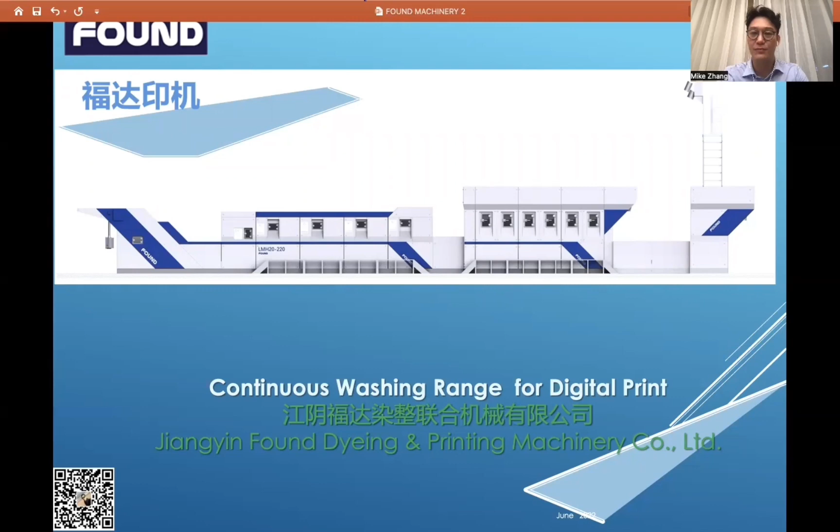Found Machinery Company was founded in 1983. We are one of the directors of the Home Textile Association, China Dyeing and Printing Association, and the China Knitting Industry Association.

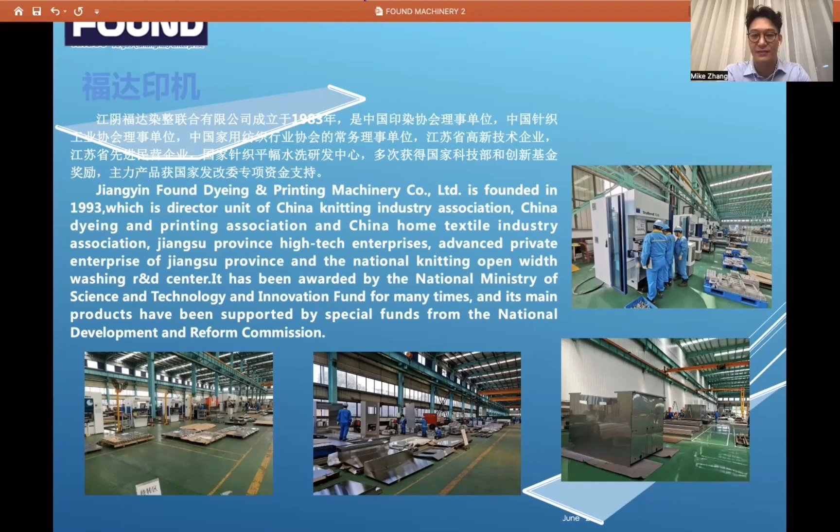We have one R&D center focused on washer after print. Since we have 40 years experience in this industry, we are offering different kinds of machines to the market all over the world, including pre-treatment machines and after-dyeing or after-printing washing.

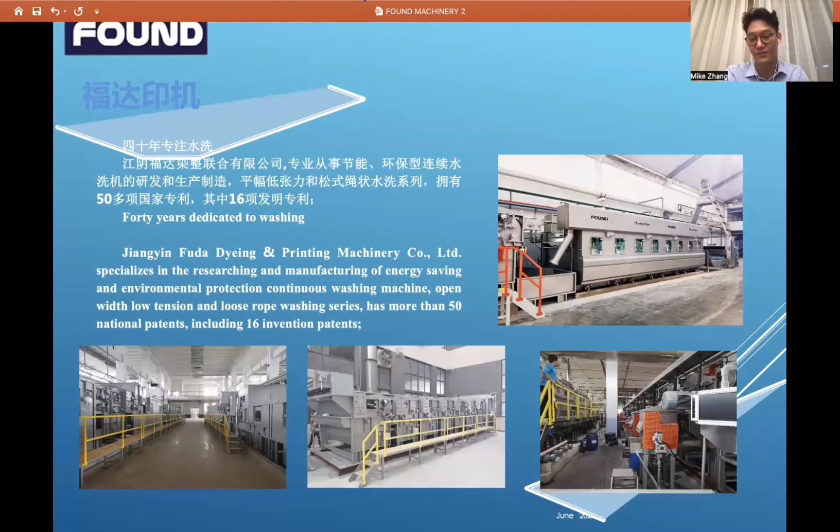We are specialized in the low tension washing machine. And now we have more than 50 national patents, and 16 of them are invention patents.

Since the digital printing industry is booming these years, Found started our machine design 10 years ago, including the pre-coating machine, steamer, and the washing after digital printing. It was small production years ago in digital print, but it is getting bigger and bigger.

We started to do the pre-treatment and the washing by ourselves, while it was done by other traditional printing companies before.

Production in digital print is getting much bigger, and we need better quality control and high and quick delivery time. All these reasons make digital print companies becoming total solution printing companies, like mini traditional factories.

But digital print is quite different from traditional. We have to buy the right machine for smaller space, smaller power consumption, including water consumption. And we need to fulfill different kinds of fabrics, which may be tight or soft, woven or knit, light or high GSM.

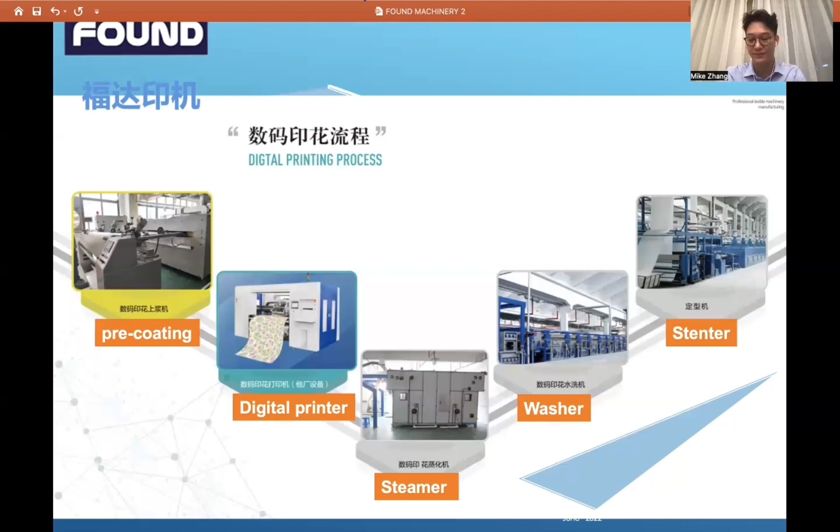Yes, this is the pre-coating machine. Actually, this design is mainly derived from the stenter. We can also call it the mini stenter machine.

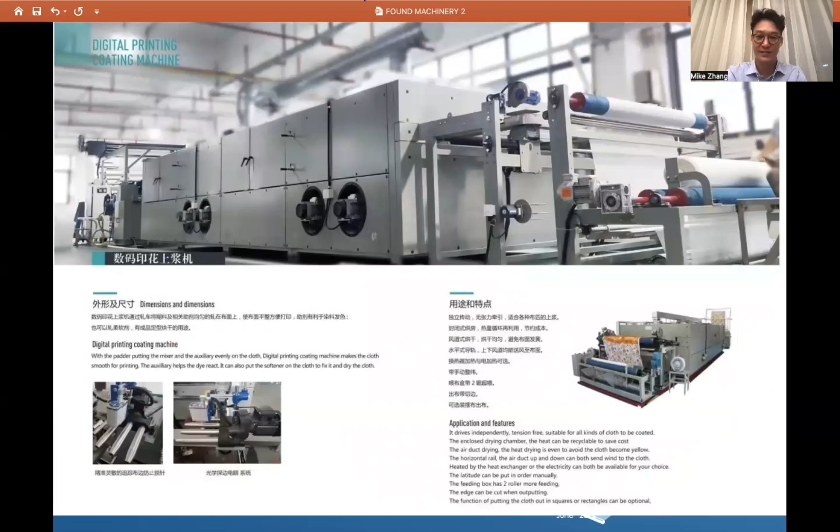In the pre-coating machine, we include everything like the stenter, including the opener, the centering device, and the heating system. For the heating system, we have two options: one is the electric heating system, another is the steam system. Also, we can choose gas if you want.

In the drawing, we can see the size. It will be around 13 meters for the standard design. The machine width will be around 2.9 meters, and including the control panel, it will be around 4 meters.

We can see in the drawings, there is one padder and 3 chambers of dryer. Then we can use the plater or the folder at the end of the machine.

For the pre-coating machine, we will control the temperature around 120 to 130. The consumption of steam will be around 200 per hour. And the power will be around 15 kilowatts.

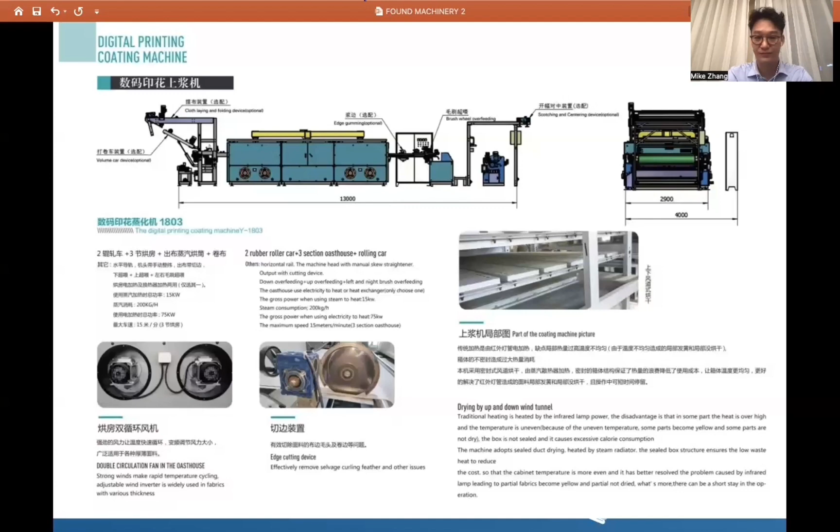The speed of the machine will be around 13 to 15 meters, like for silk or light fabrics. And for woven viscose fabric, the speed will be around 10 meters. But of course, if the fabric is heavier, it will be a bit slower compared to the normal speed.

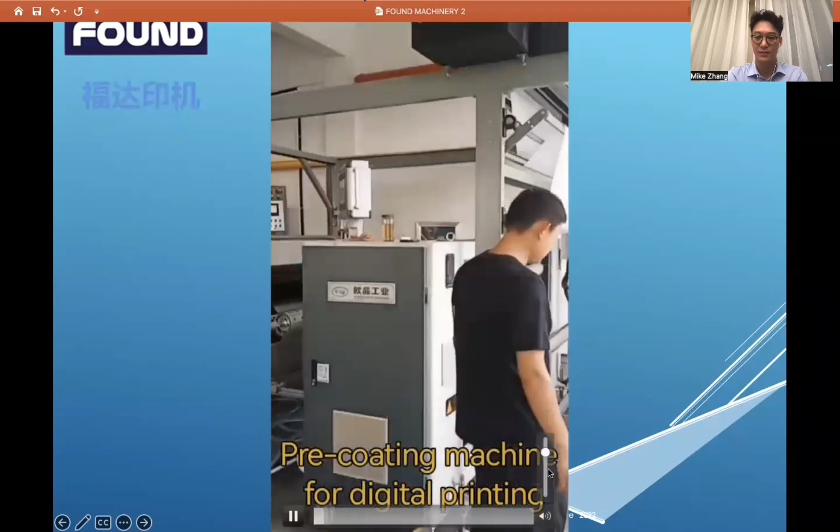Now we can see the video, which is running in the customer workshop.

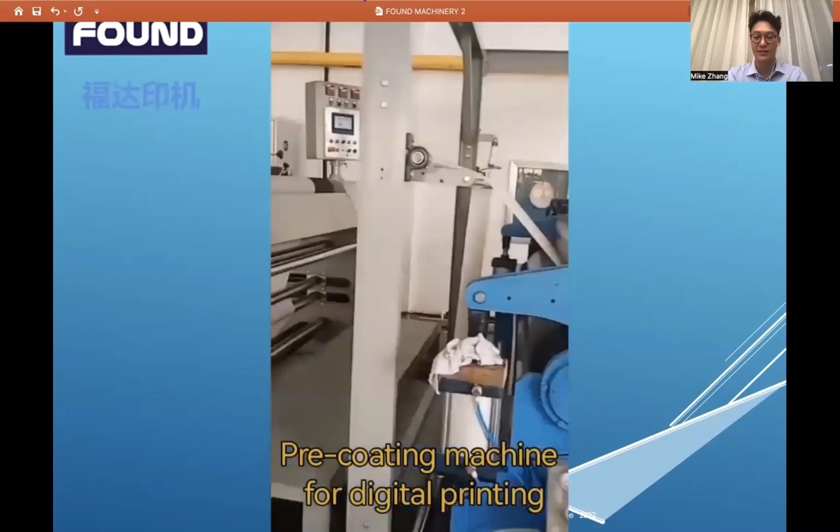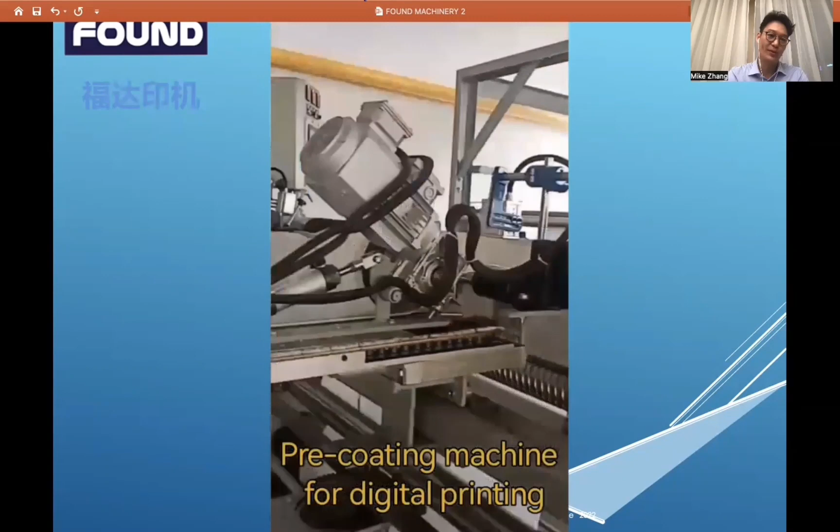You see the first device, it can adjust the fabrics. The second is the padder. Then here is the feeding system. Before feeding, we open the fabrics. No matter if it is cotton or knit, we can handle it.

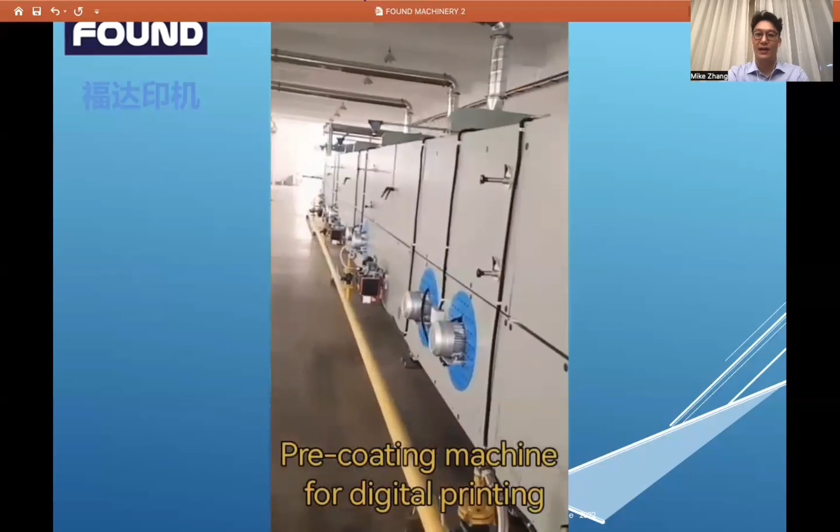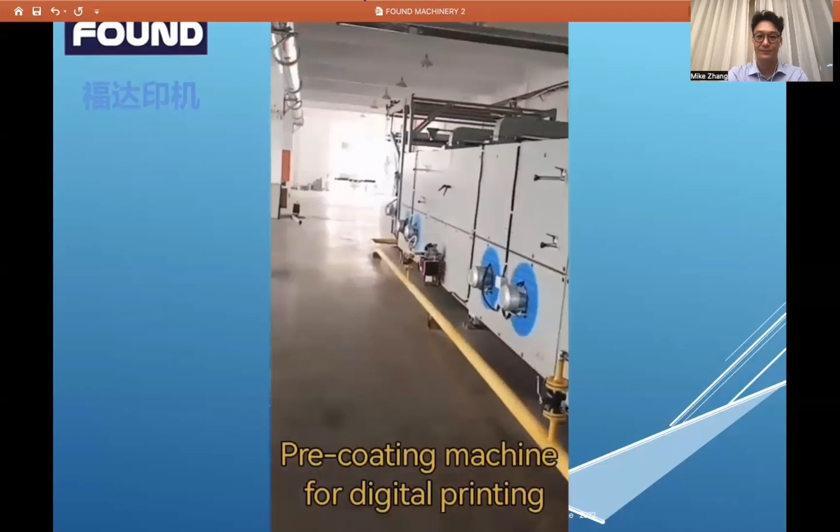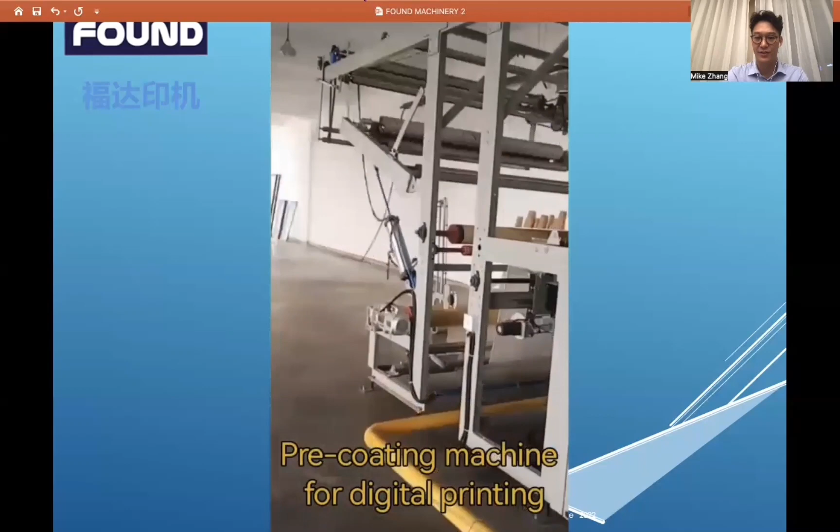And this one is the upgraded design, so the speed can be a bit higher. Now it is running around 20 meters. At the end of the machine, we can use the folder or the plaiter, depending.

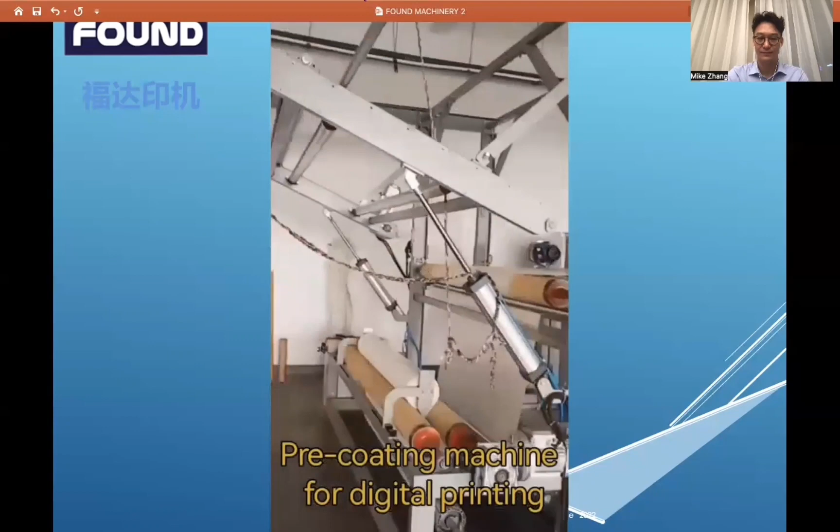We can see there is one device which can help to control the edge of the fabrics.

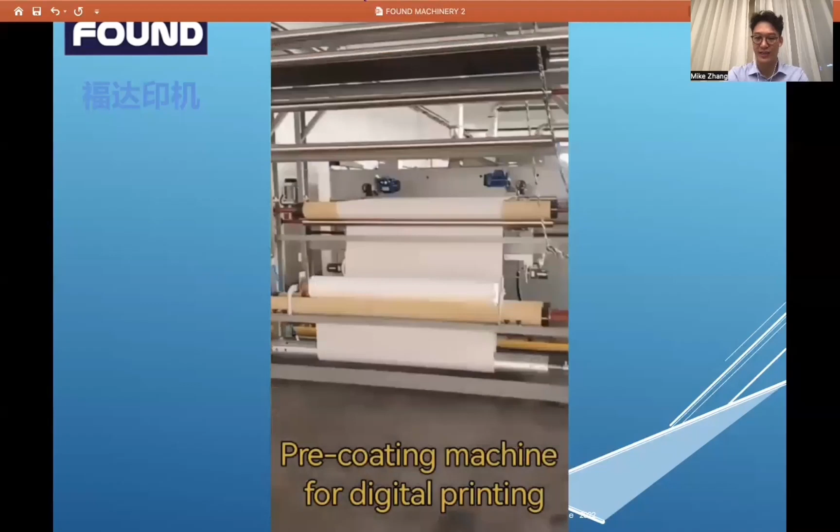Next we will go to the steamer of the digital print. As we know, the digital print steamer is quite small. At the very beginning, years ago, it was only 20 meters capacity. Now it is getting bigger and bigger. Now 80 meters capacity or 100 meters capacity is very famous in the market.

We will keep the temperature around 102 or 103 centigrade, and we will get 12 to 15 minutes steaming time for good quality. The consumption of the machine will be around 100 kg per hour. So we can get around 7 meters per minute speed, which means we can get around 400 meters per hour.

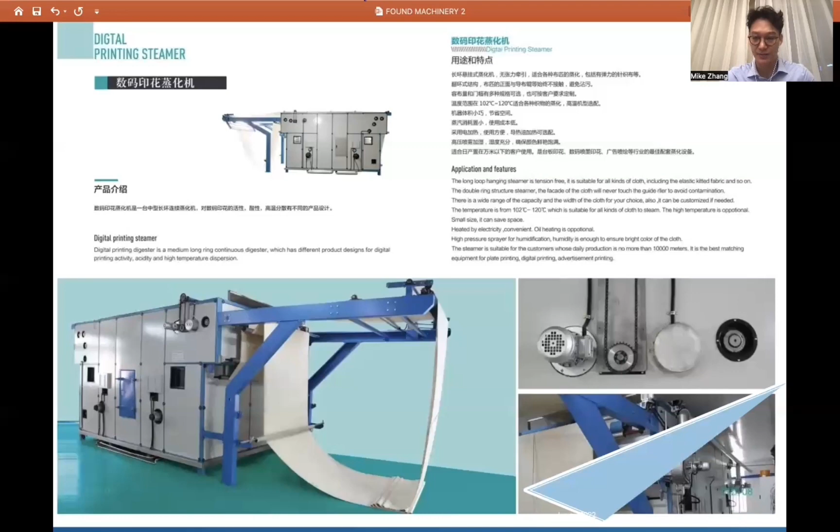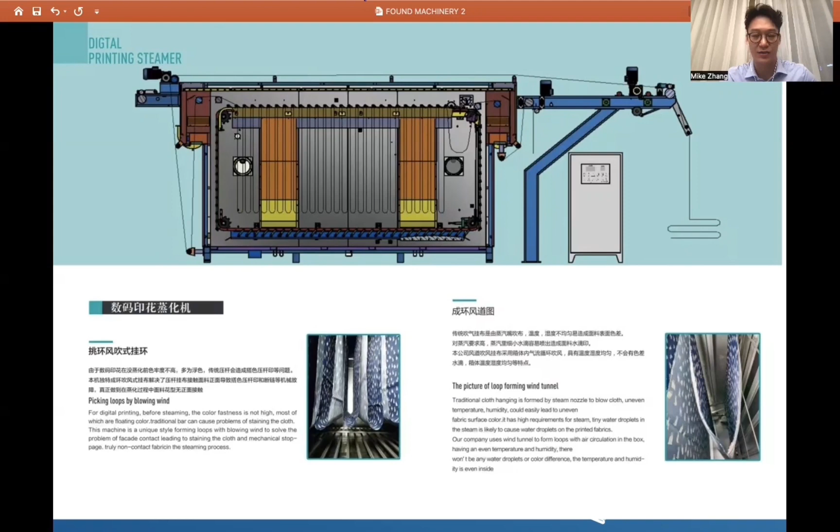For the next page, we can see the situation inside the steamer. The length of the ring, which is hung inside, is around 1.6 meters - I mean the length of the fabrics from top to the bottom. And we use air to make the ring of the fabrics to prevent the stain on the printed surface.

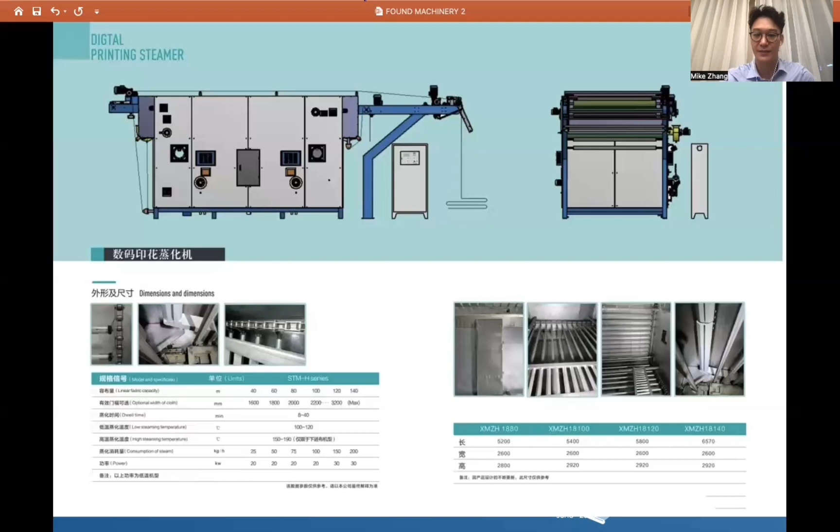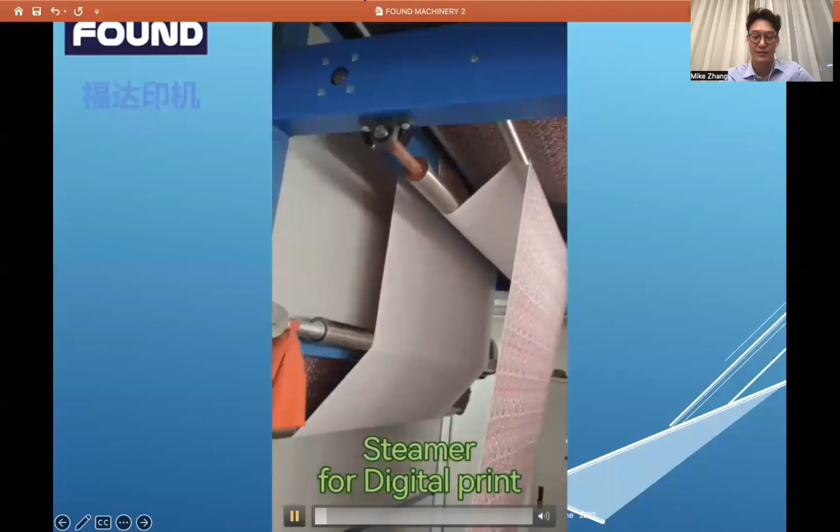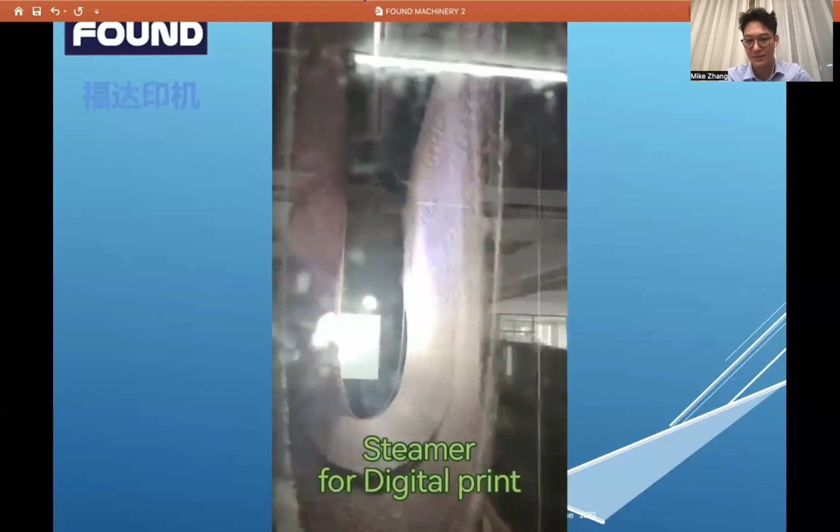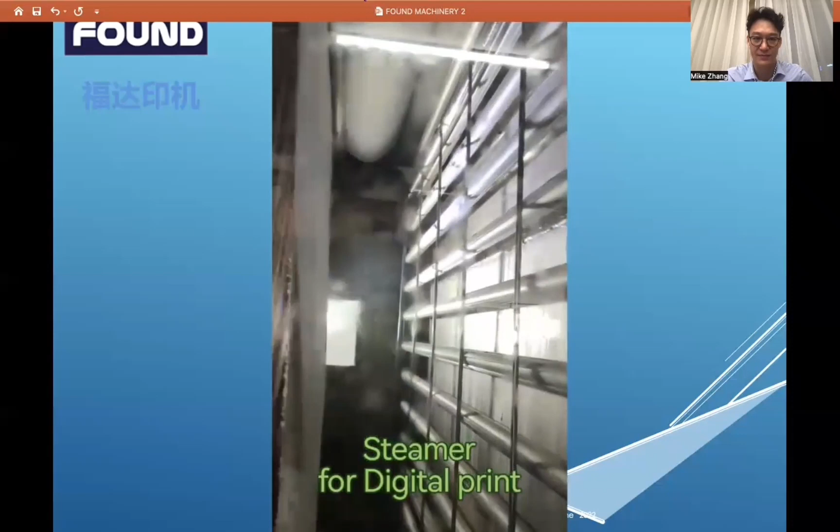Next, we will see the working video of the steamer. This machine is designed for the customer who doesn't have enough space, so the feeding device and the plaiter device are on the same side. The operator only stands at the feeding position so that he can control the machine very easily. Here we can see we are using air to make the ring of the fabrics, so there's no touching on the surface.

Next is the most important thing of this speech, the afterprint washer. Found is very famous for the washer compared to other machines - we have a history of 40 years, and the first machine we made was the washer. Today, we will introduce two options for washing after digital print.

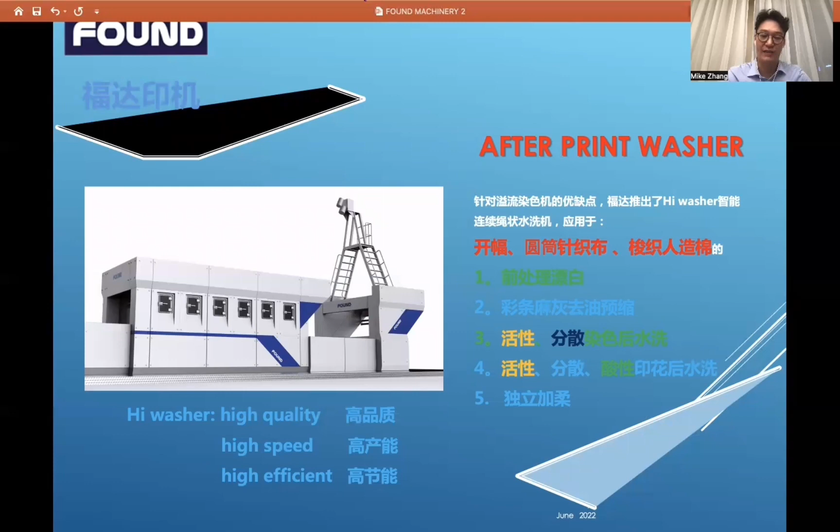The first machine is the open width washer. It is widely used in China and other countries because most digital printing is done on silk. This open width digital print washer is very suitable for customers who are mainly doing silk and woven fabrics.

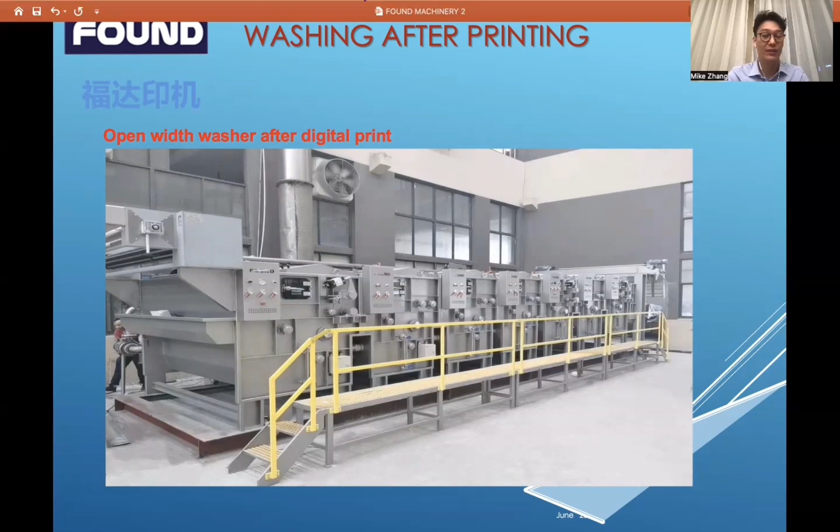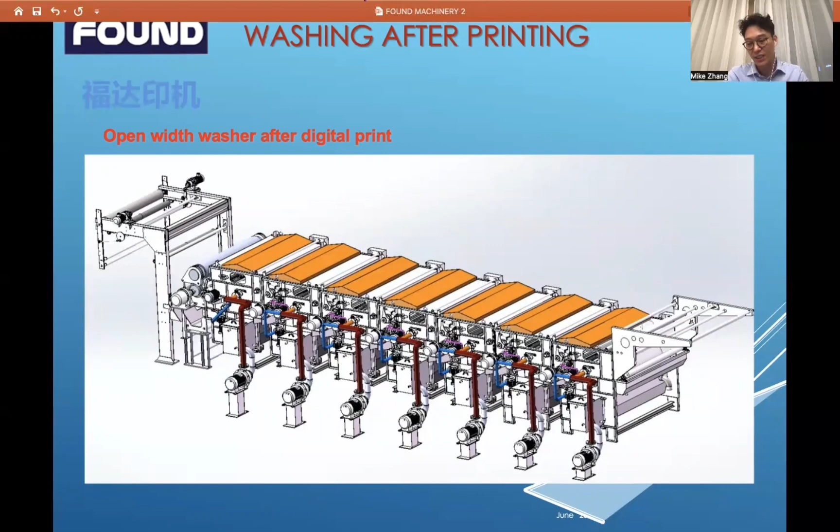This is the multi-site 3D drawing. We can see in every washing chamber there is one recycling pump and one filter. It will be helpful when we are doing woven fabrics, especially viscose, because there is a lot of fiber or dust coming from the fabrics. So we need to filter it, and that will help save water consumption and steam consumption. We can see the whole machine is closed, so there will be no steam coming out and no leakage of water, so it will be very clean in the workshop.

Inside the machine, there is tension control. So even when we are doing very light fabrics, including maybe around 60 GSM silk or around 100 GSM viscose, which is very easy to break when wet, the machine can handle it, no problem.

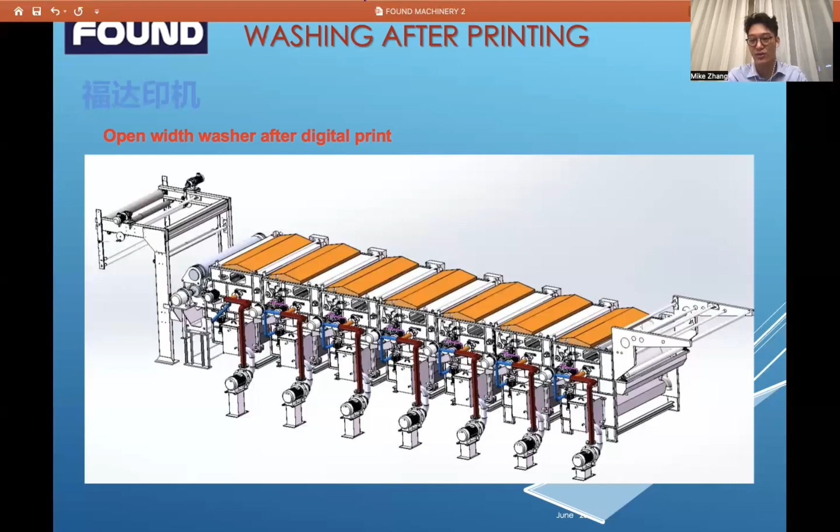And once it is controlled by PLC, there is software to help with very easy control, and we can get very good repeat production.

Here we can see the drum washer inside. There is a lot of spray inside, and the pressure is high. A lot of holes on the surface of the drum can very efficiently remove the dust or the color on the surface.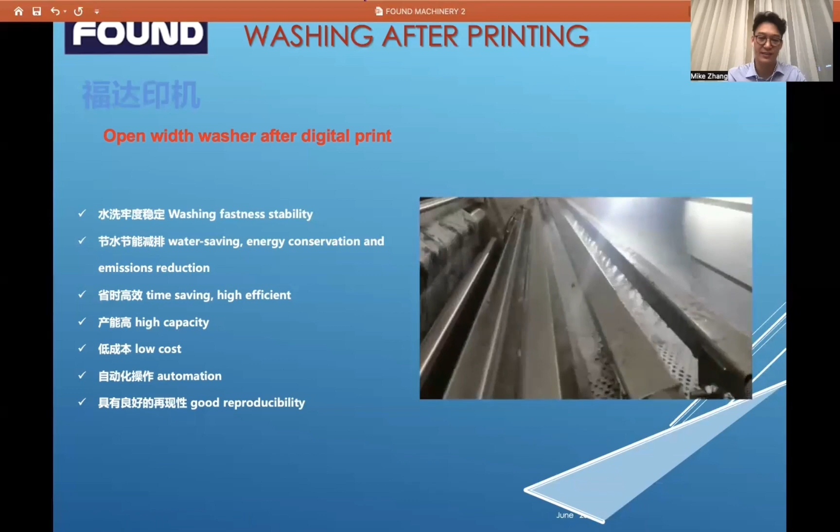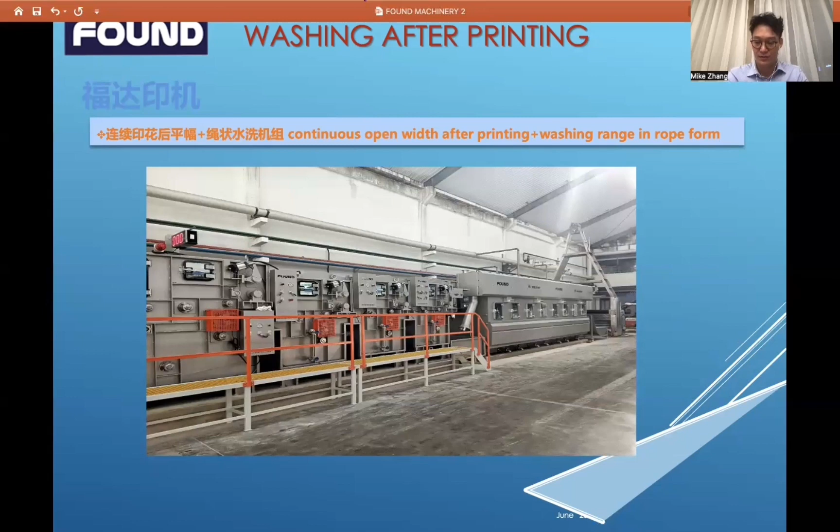But the most advanced machine for the digital print washer is this one. It is the combined washer, including the open width washer for pre-washer, and then the rope type for soaping. It is the most famous and most efficient washer for digital print. That is why I recommend all of you to consider this one. We call it the golden partner of washing after printing.

We are using the MS drum washer with Hi washer. We call our smart rope washer name Hi washer. It will help a lot to save the space of the machine compared to the pure open width washer.

Another advantage is we will have 3-minute storage, pre-wash storage in the first chamber. Then it will help make the fabric softer. And the chemicals, when we are doing the padding in the fabrics, after 3 times drying, it will help to remove the dust and the chemicals, the padding chemicals, very efficiently.

Once the chemicals are removed, it will be very easy to do very good quality washing. I mean very good quality soaping and clean wash.

In the rope type, there will be around 25 minutes soaping, so it is quite a long time compared to the open width washer. Normally we can get much higher speed, much lower consumption of water and steam, but much better quality and production.

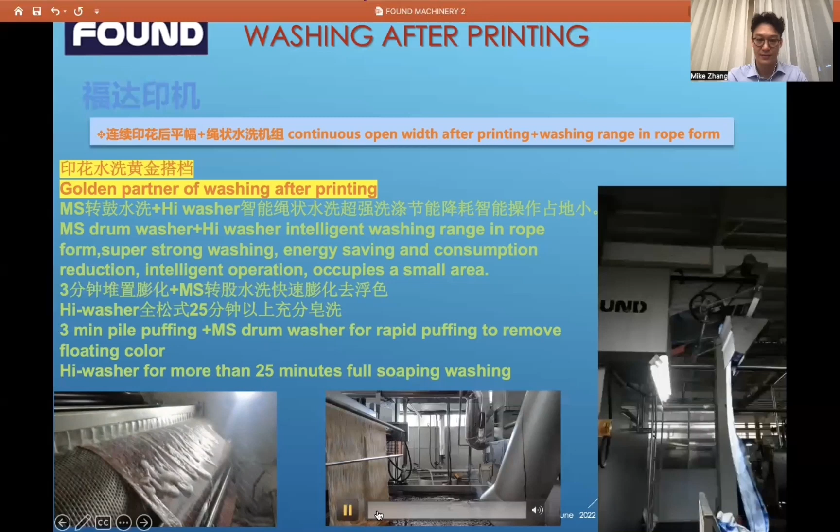Here is the device from the open width to rope. From this position, a lot of chemicals, the padding chemicals, have already been removed. This one we did the video from the end. It is the twist, the rope washer, and in the beginning it is open width.

Of course, this one is very big. The speed we can see is around 60 meters. In the first several chambers of the open width, we can remove all of the padding chemicals and the surface color. Then it comes to the rope type.

Of course, we can do a smaller machine when we are doing only digital print or small production. We can do options from 5,000 meters per day to 50,000 meters per day, depending on the customer's production.

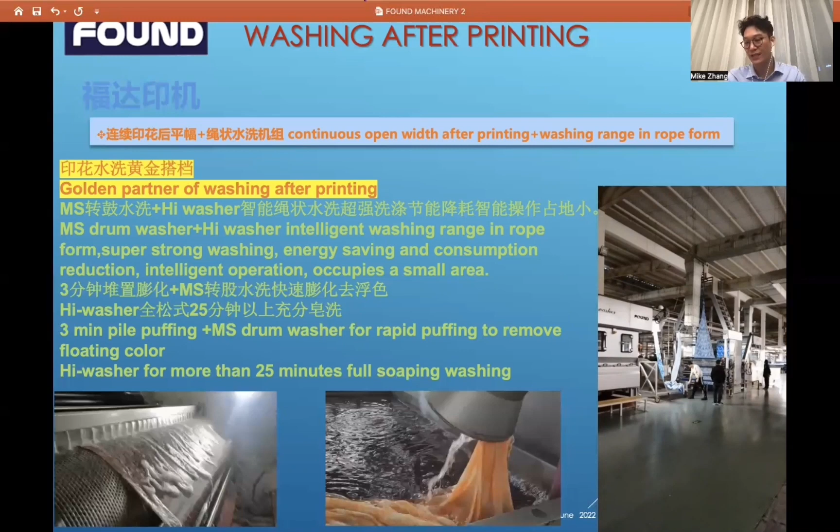Okay, from this process design we can see the design from different chambers. The first one is the relax print washing. Then another 3 drum washer to remove the paste quickly. Then come to the Hi washer.

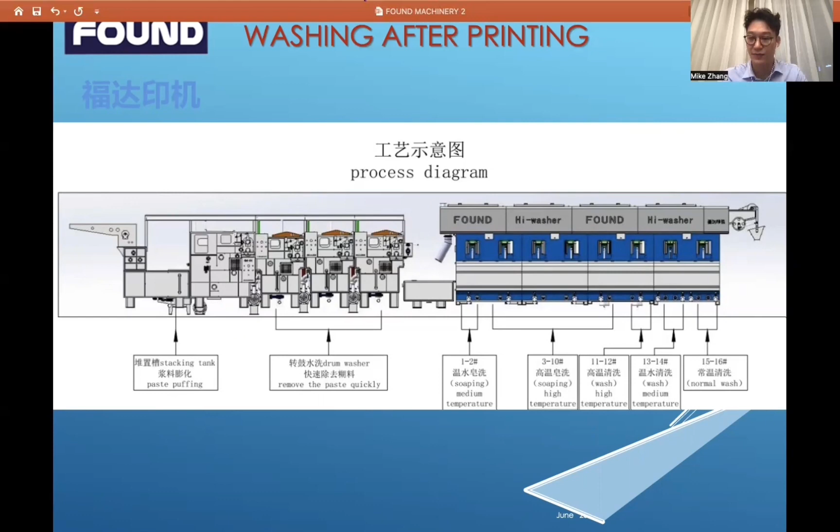The first 2 chambers are the very warm soaping. From 3rd to 10th chamber, it is the high temperature soaping, around 85 to 90 degrees. 11th to 12th is high temperature clean wash. Then the last 4 is a warm wash and cold wash.

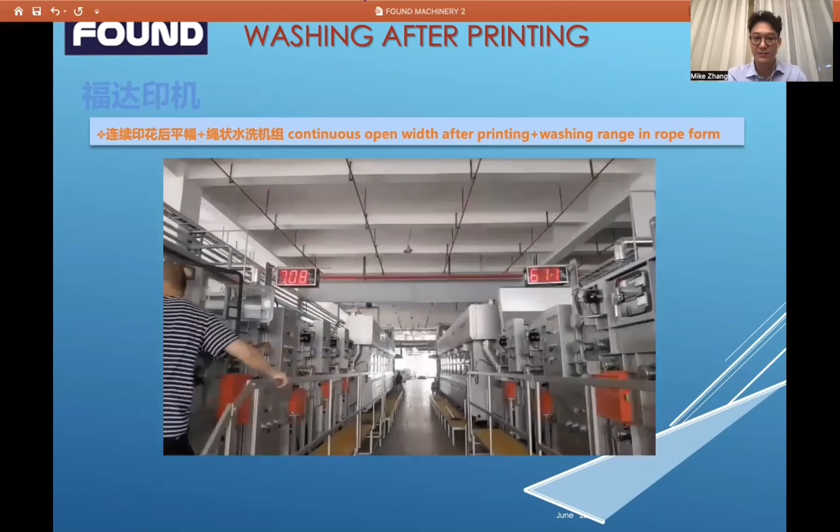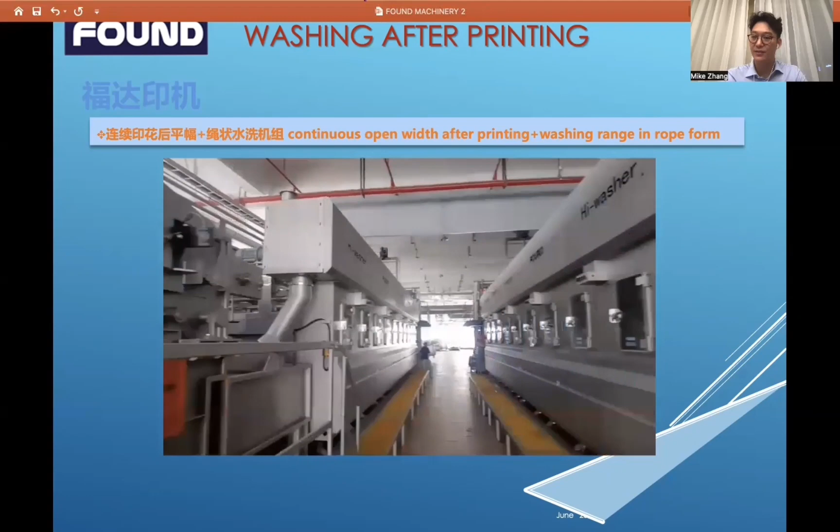This is the customer workshop running video. We can see 2 machines here running together. Both of them are running at a speed of 70 meters and 60 meters per minute. This customer is doing digital print and traditional print, both, so their production is very big. It's the relax washing inside.

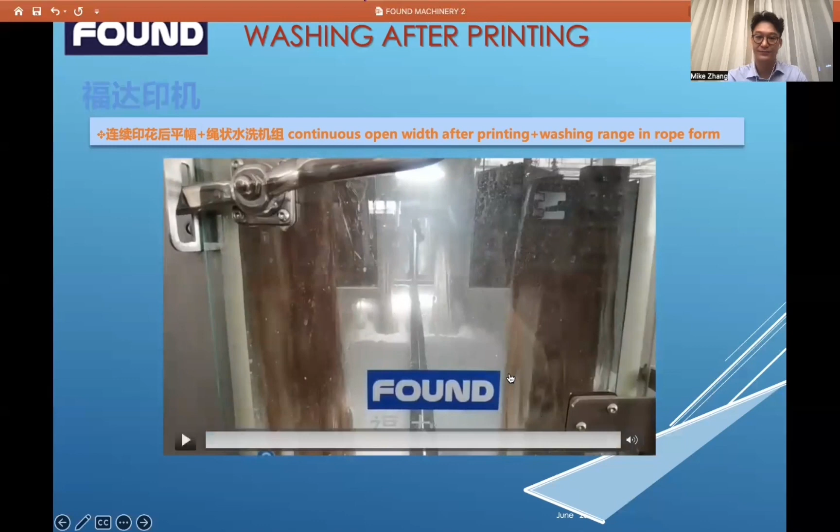This is the open width, including the pre-washer, drum washer, and rope type washer. There will be 3 open width washer and 16 rope type washer.

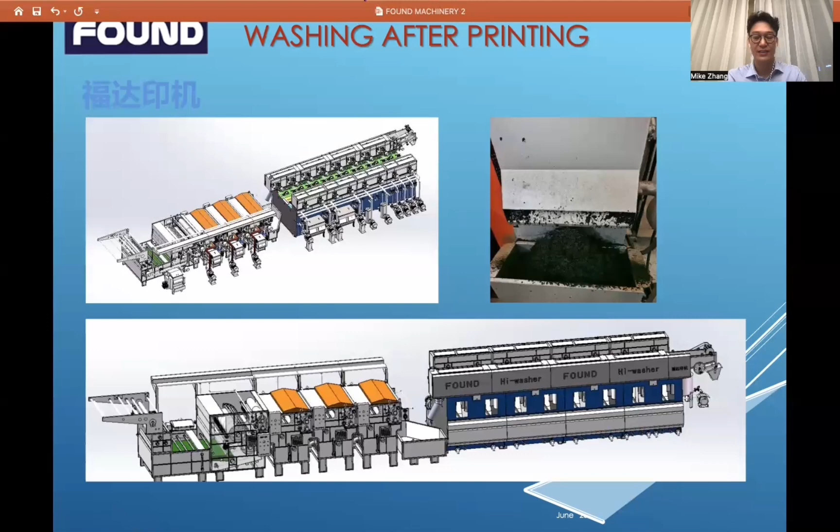Then the filtered water will go back to the washing chamber. We can see this is the drawing for the rope type.

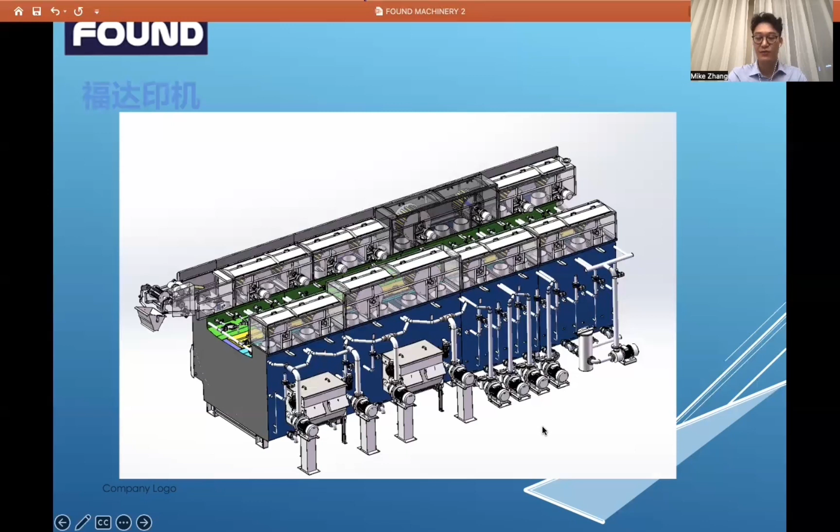From the motor side, we can see there are some automatic filters. There are 4 automatic filters, and some are very easy manual filters, because it depends on the different customer. If you are doing mostly knitting fabric or cotton woven fabrics, there may be a lot of dust coming down, so we will need more automatic filters. But if you are doing very clean fabrics, we don't need so many automatic filters, because at least it causes some electric consumption. We can turn to manual filter.

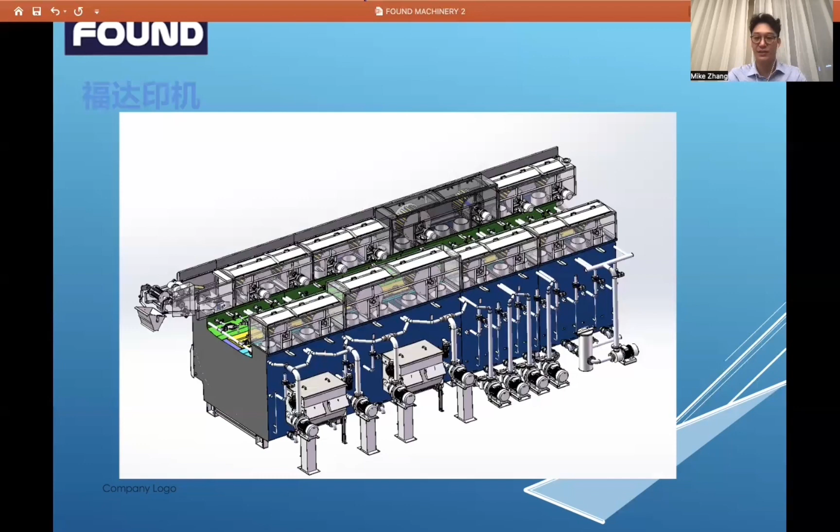That's all. We can see from the first to 9 or 8, we are doing soaping, then wash, then the clean wash. Also, we can do some color fastener and the softener inside at the end of the washer. Of course, we can also do some pH control at the end of it if the customer wants.

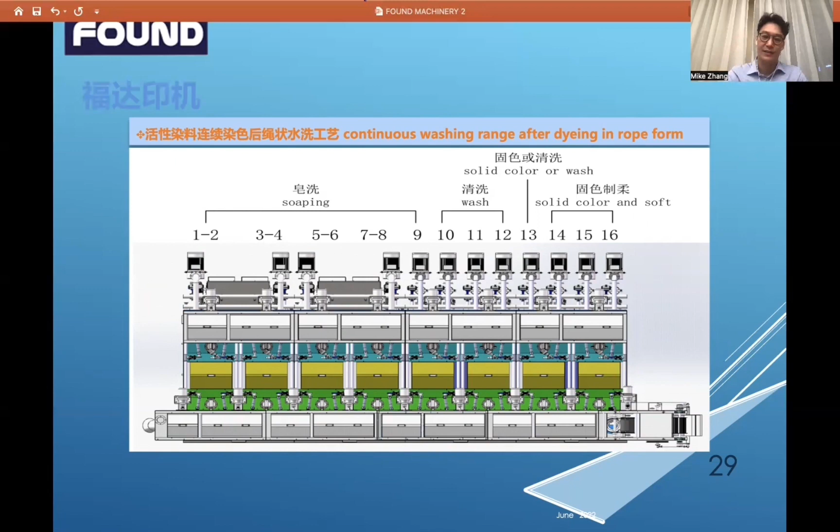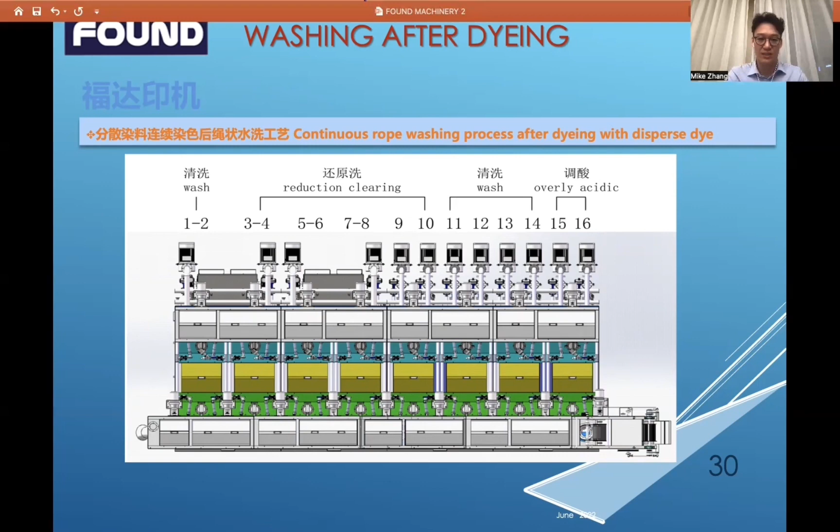This is the disperse print, because nowadays some customers are also doing the digital print disperse. So this is the process for that. Maybe you will ask why we need to turn from the open width washer to rope type. We can see the advantage because we can get a much better hand feeling.

Compared to the open width washer, there are so many advantages from the combined machine, combined washer. Like we can get much better hand feeling and style, because for viscose and maybe some similar fabrics, we will need to get very good hand feeling. But once we are doing it on the open width, it will be very hard, the hand feeling not so soft. So the rope type will have this kind of advantage.

And the second is the gram weight shrinkage, because even we are using load cell to control the tension on the open width washer, there is still some tension inside, but it is very soft and relaxed in the rope type, especially for some very light GSM knit fabric or some lycra, also some fabrics with spandex want very good shrinkage. Rope type washer will be much better compared to the open width.

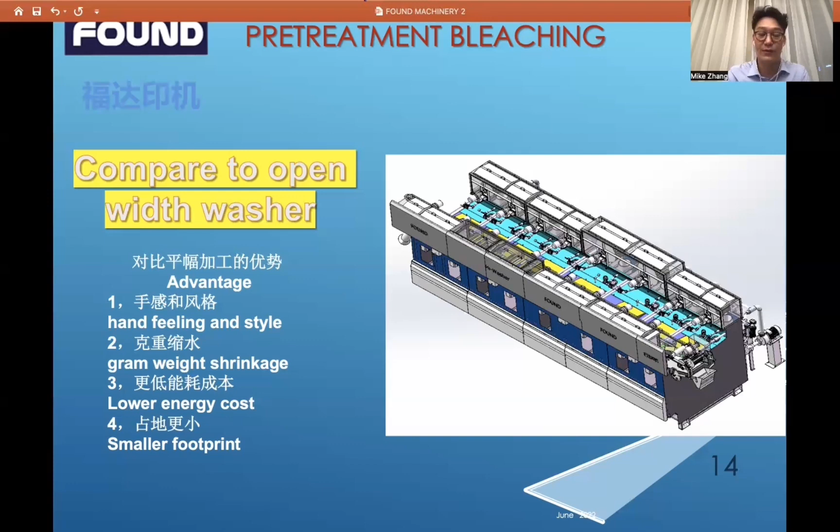Of course, the combined machine is flexible for different processes, not only print. Because some customers are not only doing digital print, but including dyeing. So we can use this washer for after-dyeing wash, including reactive dyeing, dispersed dyeing, or acid dyeing. So we can see the video here.

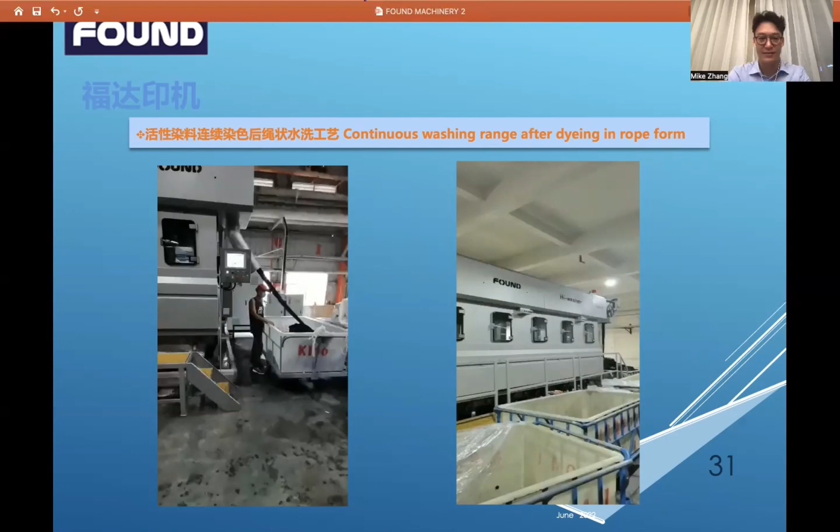It's the customer from Cambodia. Sorry.

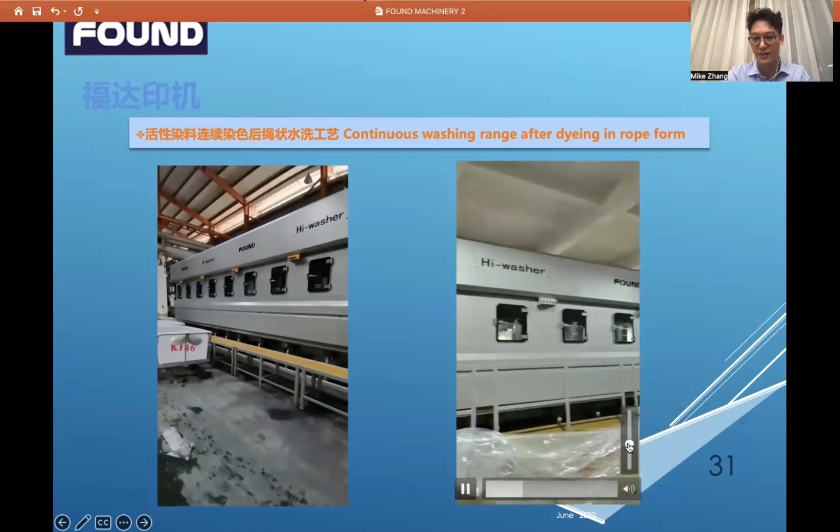This machine has 20 channels. We are doing the very high quality reactive washing. And this customer is in Guangdong province. They have 3 of our washers. And this is the situation like I mentioned — they are doing the dyeing house and the digital print. They are using 2 Hi-washers for after-dyeing wash and one washer for after digital print wash. And the very special thing is they are doing mercerizing digital print also.

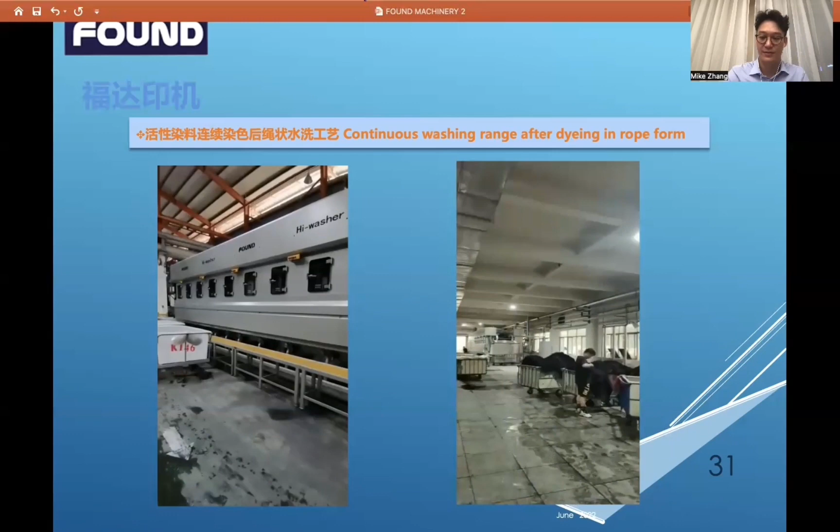Since we were founded, our machine has been developing very fast, and most of the ideas are from the real production of the customer. So we are very happy to get any information, any advice from the customer to help us do improvement and upgrades. In that case, we can get very good skill from the customer, especially for the digital print, because it's quite a short time compared to the traditional print. We are facing different situations, different challenges from the different chemicals for the digital print. So we need to push all the time. We need to do the upgrade all the time until we can fulfill the customer requirement.